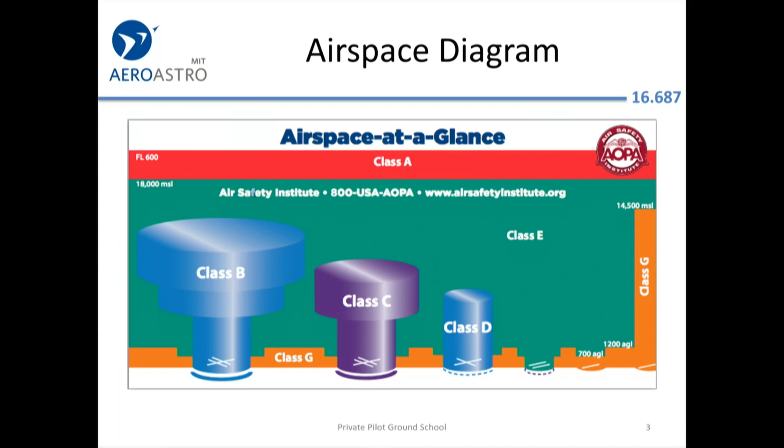Airspace, go and study this a little bit before the exam. Here are the different kinds. Remember, Class A is up high, you need an instrument clearance. Class B is around the biggest airports. Class Charlie is around Manchester, New Hampshire. And D is for Hanscom. And E is kind of everywhere else.

The goal for the basic VFR weather minimums is to make sure that an IFR plane coming out of the cloud has time to see and avoid you. Because the air traffic controller's job is to separate IFR airplanes from each other, not to separate IFR and VFR traffic. They will tell you about them, but you're responsible as a VFR pilot for staying reasonably clear of clouds. So just review these cloud clearances.

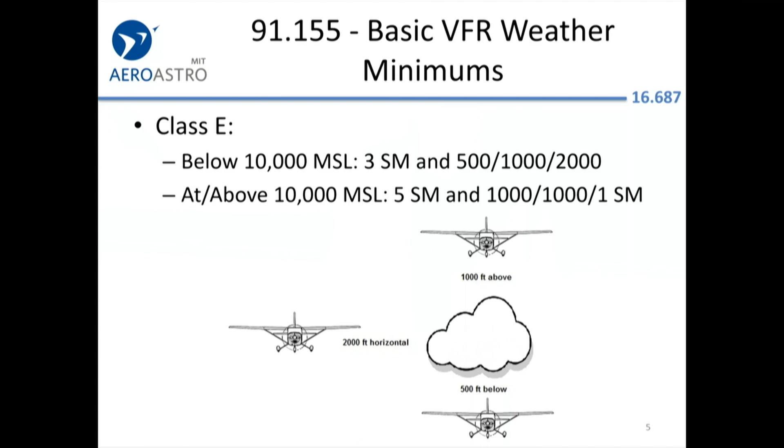Class E, you can see that this is a pretty good one to remember for the test. 500 below, 1,000 above, 2,000 horizontally.

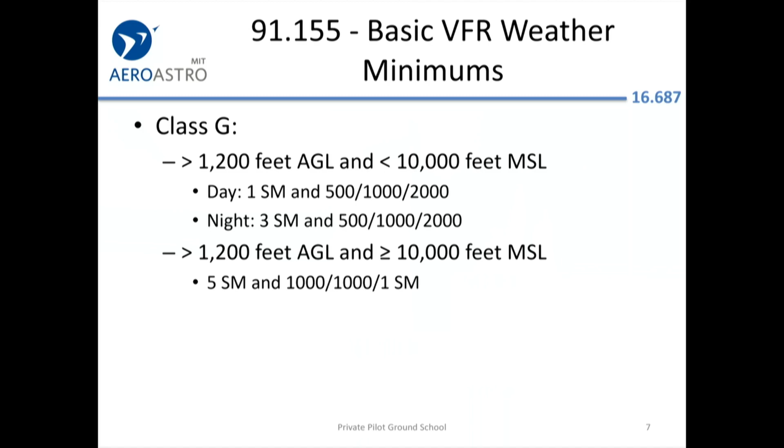If you're really low in Class G airspace, you can do some crazy stuff. Again, I don't think that this is really there to let you go from Boston to Chicago, scud running, with 1 mile of visibility and just clear of the clouds. I think it's more to enable people to take off and do pattern work at their home airport in some kind of little tiny, very slow airplane. Pattern work is just what we were drawing on the chalkboard, flying the traffic pattern at an airport. So again, just review the presentation or the FAA book so you know your weather minimums.

Incredibly, at night for Class G, getting back to that pattern work thing, if you want to go out and practice takeoffs and landings at night, if you stay within half a mile of the runway, you can go right down to 1 mile of visibility and right up to the clouds.

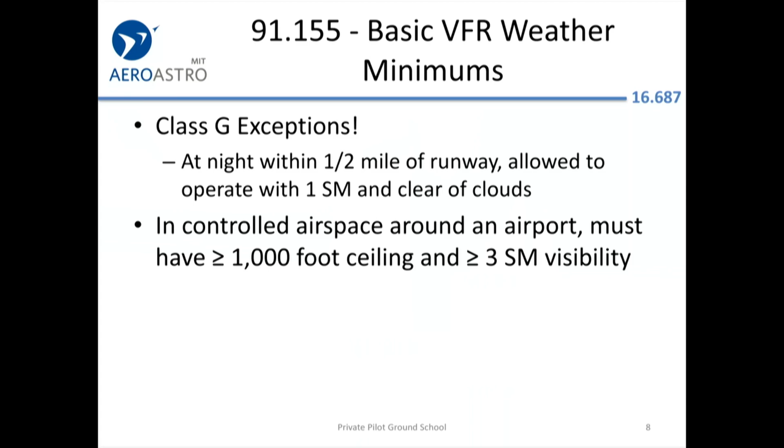Here's that chart again. Learn it, know it. Special VFR. Actually, if you're at Hanscom and the weather is below the basic minimums and you want to do some pattern work anyway, either in a helicopter or in an airplane, you can request — they can't offer it, but you can request — a special VFR clearance and they'll say okay, there's not too much IFR traffic right now. So you take off and land and do your stuff. If it's at night, you'll have to be an IFR pilot, basically.

Cirrus publishes this good personal minimum matrix. I wouldn't say that you have to adopt their specific numbers, but I think their way of thinking isn't bad. So notice they're saying, if you are, let's see, an average pilot — so you've got 10 IFR hours within the last 90 days, you've done 1 non-autopilot approach within the last 90 days — we'll go over here and go down to a 500-foot ceiling and 2 miles of visibility. Don't go down to the published approach minimums, which are designed for a 2-pilot professional crew, unless you're very current and you've done a whole bunch of flying in the last 90 days.

Anyway, so they just try to fit — they try to say, how challenging is this flight? How experienced are you in general? How experienced are you recently? And come up with some numbers. So again, you can pull this out of the slide.

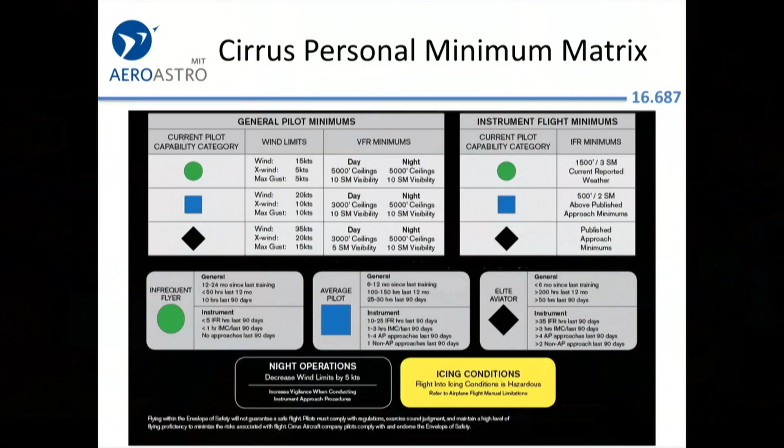And just to clarify what we're talking about when we talk about personal minimums: there are minimums that you have to know for the FAA exam, like we were just talking about in terms of the minimum visibility that must be there in order for you to fly in certain classes of airspace. But then there are also minimums that you set on yourself to be a safe pilot and to be knowledgeable about what your restrictions and what your experience and what your currency is.

So for example, we talked about crosswind. There isn't an FAA reg necessarily — as long as it's within your aircraft's operating conditions, there's no specific reason why a 15 or 20 knot crosswind is a problem. But maybe you're not very comfortable with it, you haven't done a lot of slips recently, you're still getting used to your aircraft. So you might say a smaller crosswind or gusting winds would be appropriate for you to land in. That's setting a personal minimum on yourself, an example of personal minimums based on your experience and your currency.

The FAA will never suggest this, but the appropriate escape from a challenging situation that you think might be on the edge of safety is to rent the 5-seat SR-22 instead of the 4-seat SR-20 and go with an instructor. So it's as easy as that.

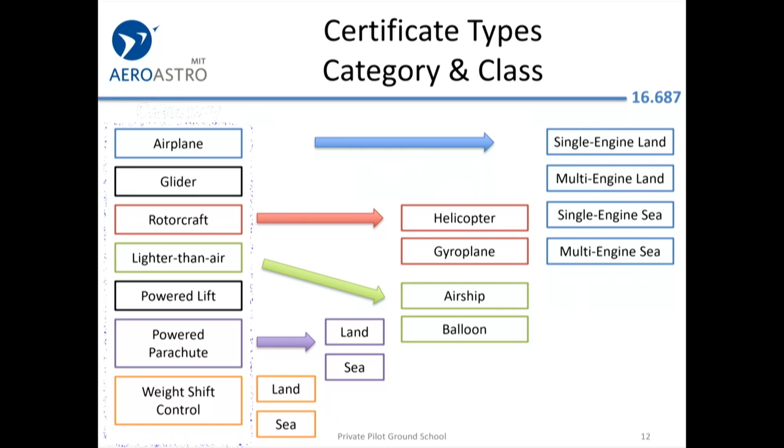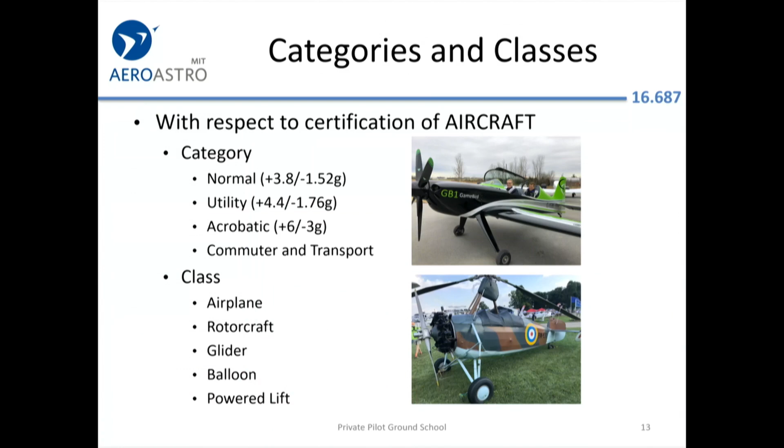Remember this was confusing: they used category and class to mean two totally different things. For getting your pilot certificate, category is something like airplane versus rotorcraft, and class would be multi-engine land versus helicopter. But for aircraft, they do something totally different: category would be normal category or acrobatic, and class would be airplane. They may ask you about this just because they like to torture you.

The 4 forces of flight, remember these. Tina talked about them. If you're just bombing along straight and level, not accelerating, then they're all going to be in balance because F equals ma. Anyway, F equals ma, I know that much.

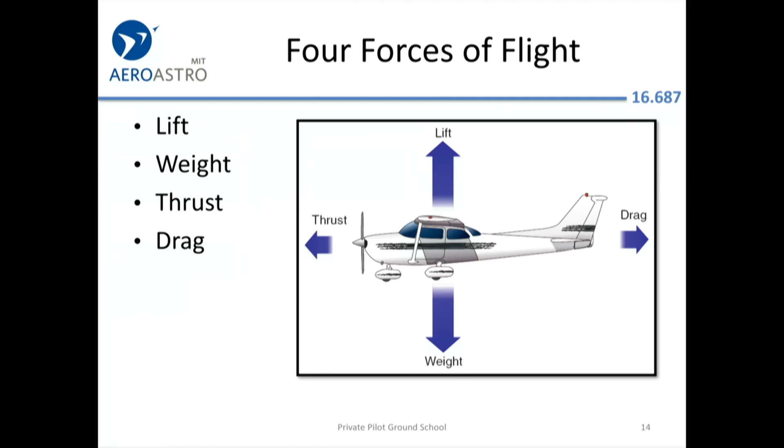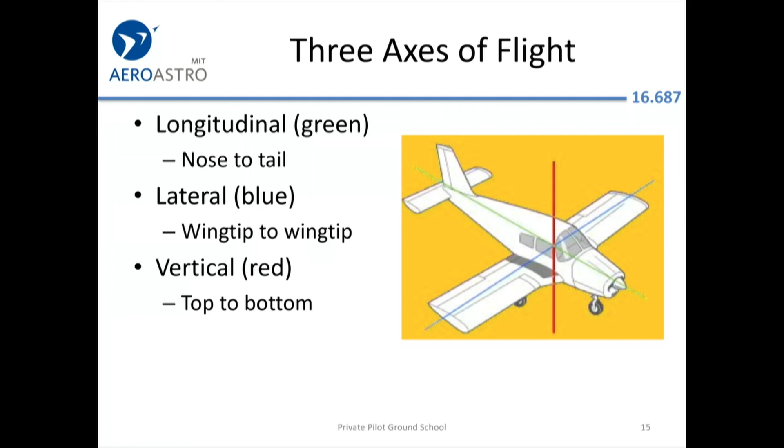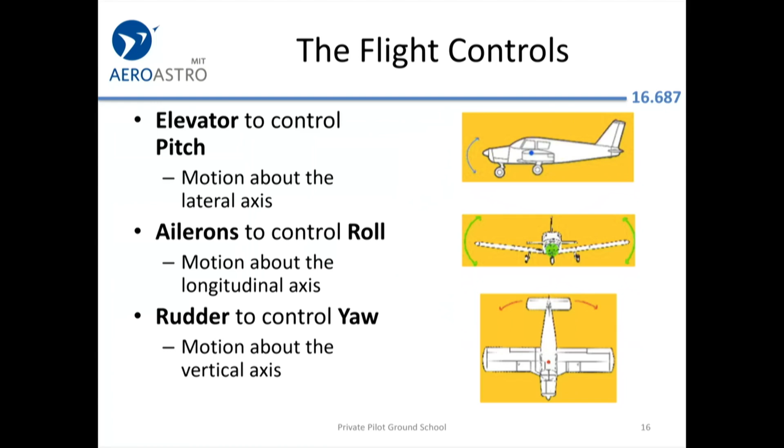Remember these 3 axes, they'll ask you about this on the test, usually in combination with other stuff. Rotation about the vertical axis is yaw. Rotation about the lateral axis is pitch. Rotation around the longitudinal axis is roll. So pitch, roll, yaw - think about it. Roll is really the lateral motion, but it's around the longitudinal axis, so don't get confused there.

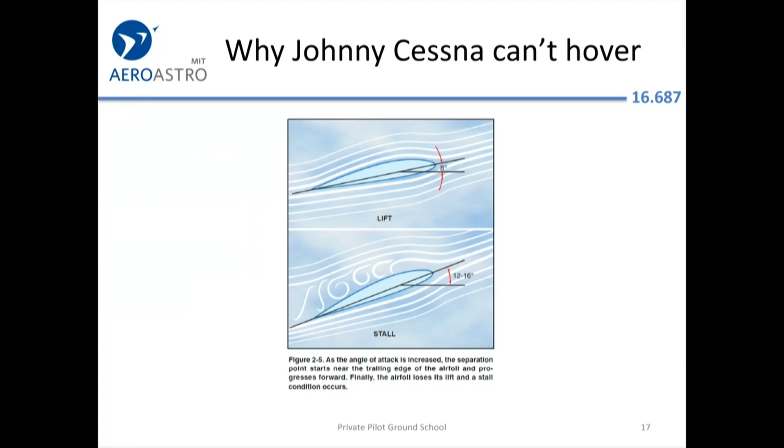Remember why Johnny Cessna can't hover - this limits everything basically. The stalling angle of attack is why you need a helicopter if you want to hover, and it's why you need to maintain a reasonable airspeed when landing, and it limits your runway. If you had an airplane that didn't stall until some crazy angle of attack, you could probably take off and land in 50 feet.

Remember that even a paper airplane can generate lift. So it's not about the shape of the cross-section of the wing that lets you generate lift - it's the angle of attack and your ability to deflect air molecules down. That's what generates lift. The shape of the airfoil is just what Philip was saying - it allows the stall speed to be lower.

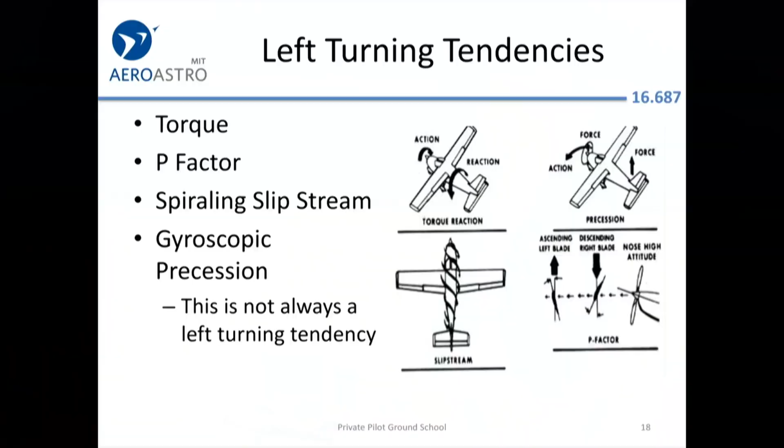All right, remember your left turning tendencies. Mostly you just need to remember that you need right rudder.

A couple questions had come up on gyroscopic precession, so I added 2 videos about gyroscopes to help you understand gyroscopic precession and why that force is applied 90 degrees later. Those are really fun videos you can look at - they're in the slide deck called Q&A and Review.

Okay, let's go back to the altitudes. True altitude is your actual height above sea level. This is important if you want to get over a mountain, because the altitude on the chart for the mountain is also the actual height above sea level.

Indicated altitude is what your altimeter shows. If you're below 18,000 feet, it's not some insane temperature, and you've got a current altimeter setting from air traffic control - as you fly along with VFR advisories, they'll keep updating you with altitudes. If you're not talking to ATC, you may tune into the airports you're flying over to get the altimeter there. If you have your correctly set altimeter, it should be pretty close to your true altitude, and the GPS will give it to you as well.

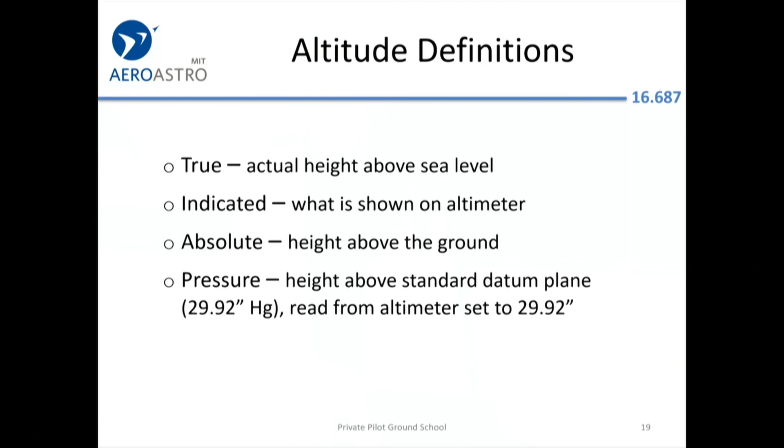Absolute height above the ground, I don't think that's ever really relevant. Pressure altitude is what you see if you tune your altimeter to 29.92.

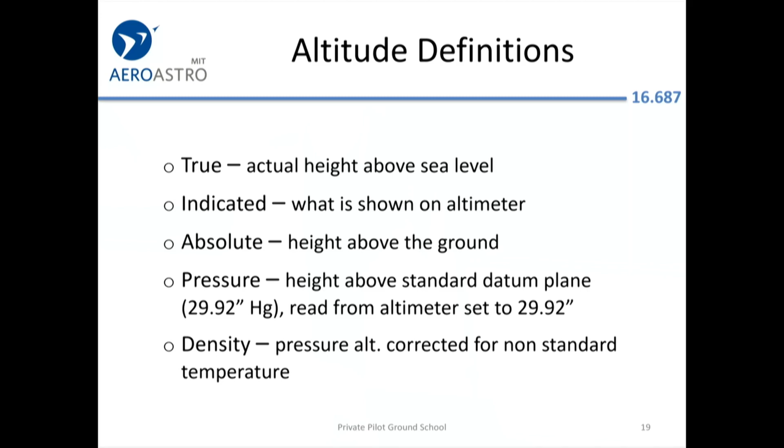Density is critical for determining performance of both the aircraft and the engine. That's a measure of how many actual molecules of air are there going to be in, say, a 1-liter cylinder.

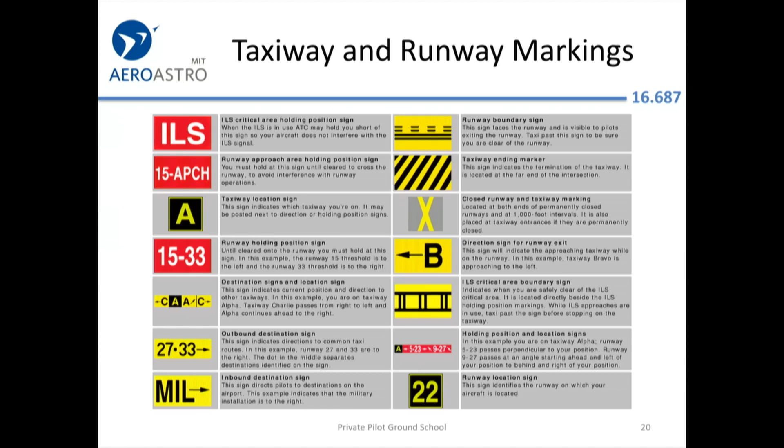Even though you're not an instrument pilot, they probably want you to know about this ILS hold short line. In bad weather conditions when they're using the ILS, they don't want you going beyond there, because your metal airplane might interfere with the radio beams being sent up to landing IFR airplanes.

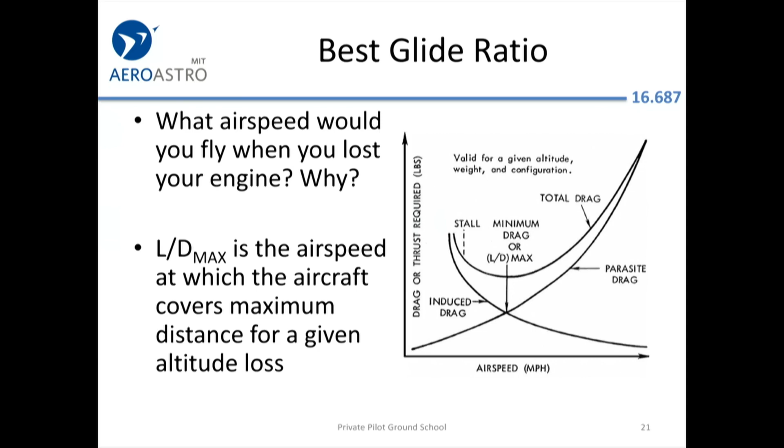Remember L over D max for best glide speed. So all these climb speeds, glide speeds, etc., are driven off the points at which the various drags reach a minimum, or a minimum per mile traveled.

Thunderstorms—the one thing I hope you remember is that everything's bad about convective clouds. Unstable air leads to cumulus clouds, which can become cumulonimbus clouds. Now you have a really bad hazard to aviation with terrible icing, terrible turbulence, maybe hail.

The squall line—I think they sometimes ask about this on the test—is the frontal band of thunderstorms. It's hard to get around them. You may have to go 500 miles out of your way to get around a cold front, or hang out on the ground for a few hours and wait for it to pass.

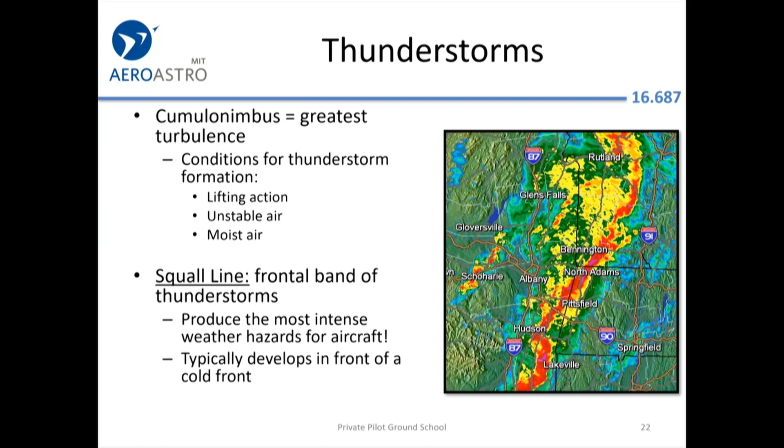Also, big changes in weather usually are not a good thing. Whether it's a big change in barometric pressure, or like we saw from yesterday to today, a 40, 50 degree increase in temperature, it's going to be accompanied by massive gusting winds. Today is not a good day to go flying.

Although actually it might not just be the day. We were ferrying a helicopter from Los Angeles back to Boston, and there was a thunderstorm coming in, so we just landed at an airport. It was probably gusting about 30 knots at the time, which isn't that bad for a Robinson, a 4-seat Robinson. Put the helicopter in a hangar. There was a huge storm, and 2 hours later we took off in beautiful weather and continued our flight.

There is usually an airport every 10 or 15 minutes of flight time, so take advantage of that if things are getting beyond your comfort zone. Don't just blindly continue to your destination.

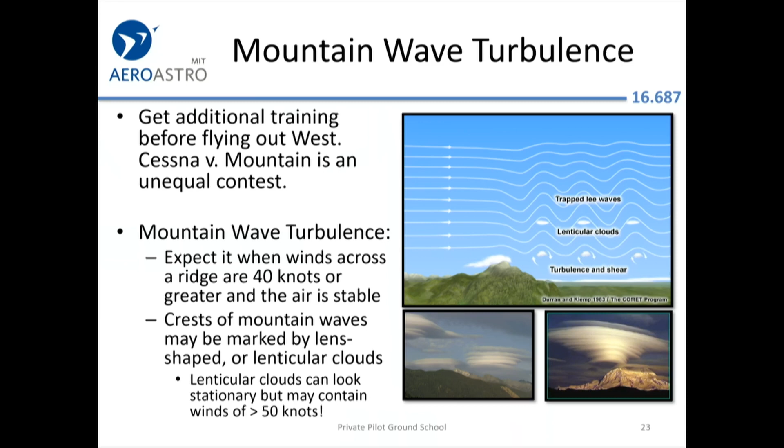Remember, the lee side of mountains is where you can get a lot of turbulence and downdrafts. A little airplane doesn't have a whole lot of climb performance usually, especially at higher altitudes. So be cautious about crossing big mountain ranges unless the winds aloft forecast is for very light winds indeed.

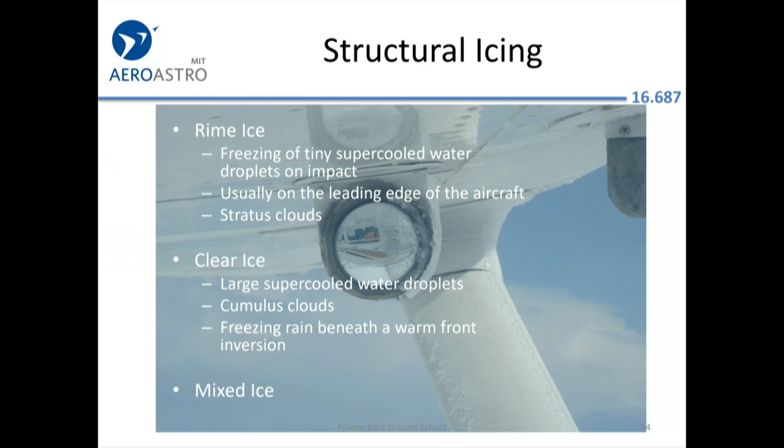Icing—also super bad. As VFR pilots, you shouldn't have to worry about this once you get into instrument flying, as I hope a lot of you will. This is really what limits your ability to travel around in a Piper, Cessna, or Cirrus during the winter and shoulder seasons.

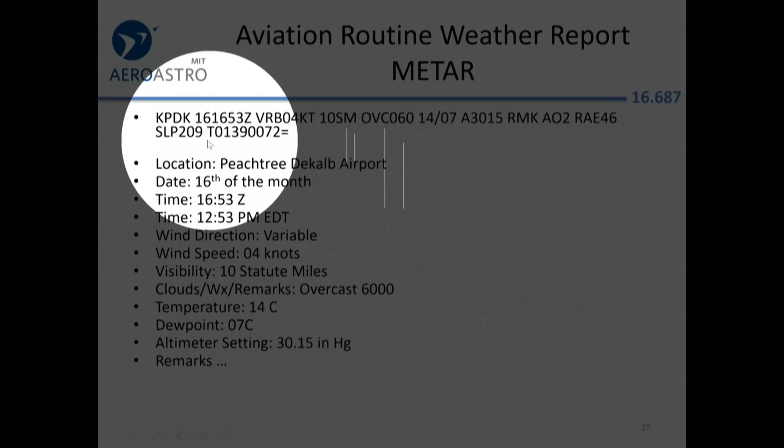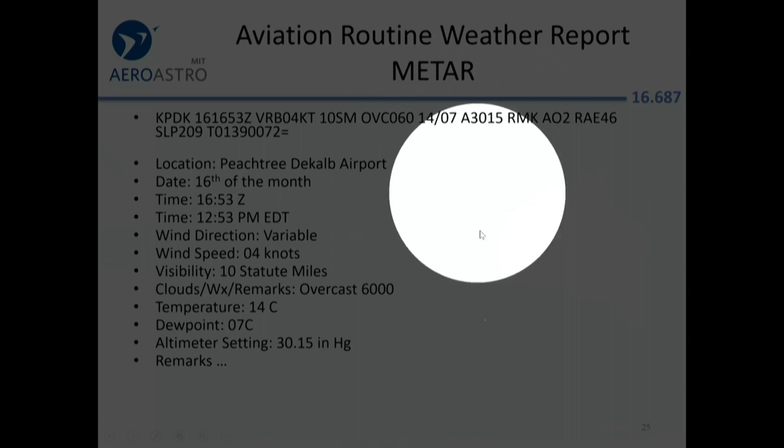Remember how to read a METAR. This is back to Peachtree DeKalb Airport in Atlanta. It's the 16th, 16:53, so about almost 5 p.m. in London, Zulu time. Winds are variable, 10 statute miles of visibility, overcast 6,000 feet—that's 6,000 feet above the airport, not above sea level. Temps 14, dew point 7, altimeter's 3015. And in the remarks it says the rain ended 46 minutes after the hour. There you have it.

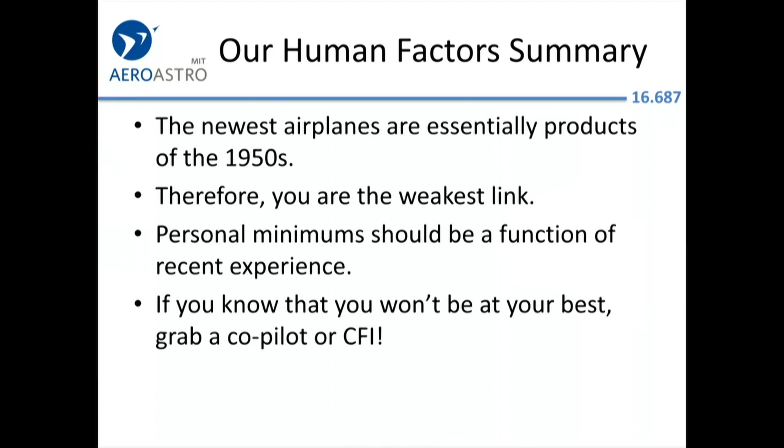Human factor summary: you are the weakest link, and if you develop some personal minimums, you'll be way ahead of the game. They should also factor in your recent experience, not just your overall level of flying. And always remember it's a big aviation community—there's a lot of people who are happy to go flying. You can send mail to members of the MIT Flying Club and just take a co-pilot. That's how the airlines have cut risk almost to zero.

Magnetic variation—this is kind of a topic that tends to snag people on the knowledge test. Just remember, you can rederive it from the VOR if you ever get stuck, and east is least, west is best. Deviation—don't get deviation and variation confused. Deviation, remember, is that tiny little correction printed right underneath the compass.

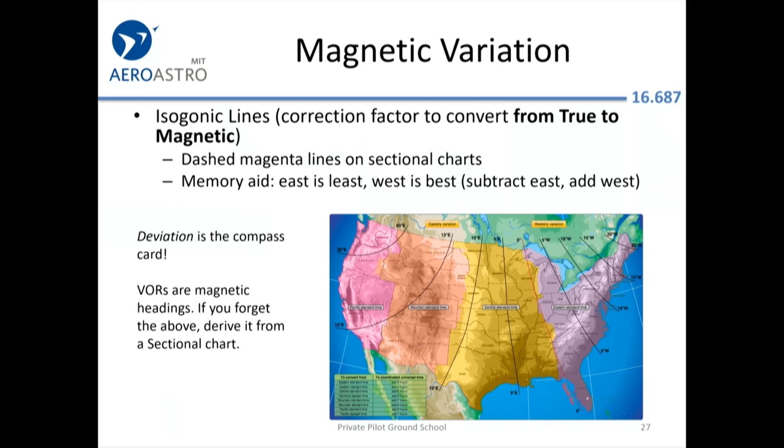Night flying advice you just heard.

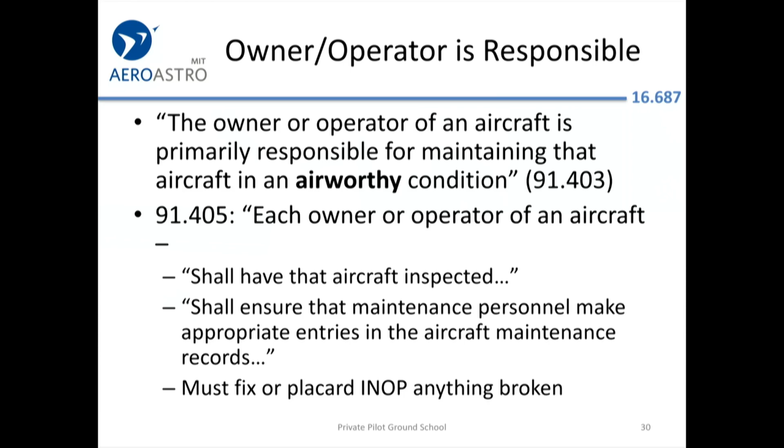Remember, as the owner-operator, you're responsible for keeping the airplane airworthy if you do choose to go out and buy an aircraft. For most of you, these responsibilities are going to be on the flight school. However, you're still the final authority as the pilot, and you can deviate from the rules in an emergency, and you only have to report the deviation if requested. I think the feds like to ask this on the knowledge test because the natural answer is, of course, you have to report the deviation. But if you declared an emergency and broke the rules, you don't actually have to report that unless they ask you to.

But even aside from an emergency, you're the pilot in command. Even if someone very assertively tells you to land and hold short, or to fly straight to the numbers—meaning don't fly the proper traffic pattern but land very quickly—or tells you no delay on the go because they want you out quickly since they have other jets, you can just say unable.

They have to deal with it and make sure you're flying safely. And especially as a student pilot, if you need extra time or consideration, just add 'student pilot' to the end of all your radio calls. They'll give you plenty of room to make mistakes, but they might also make you fly a bunch of 360s while they land everybody else, then give you time to land.

Yeah, so safety is not high tech. It should be, probably. All the stuff that Michael showed you that's embedded in that DJI drone should probably be in these multi-million-dollar aircraft, but it's not.

So in the meantime, since an airliner isn't actually that much smarter than a little Cessna, why is it safer? If you take that perspective and adapt all the things the airlines have done, you can make flying that little Cessna dramatically safer.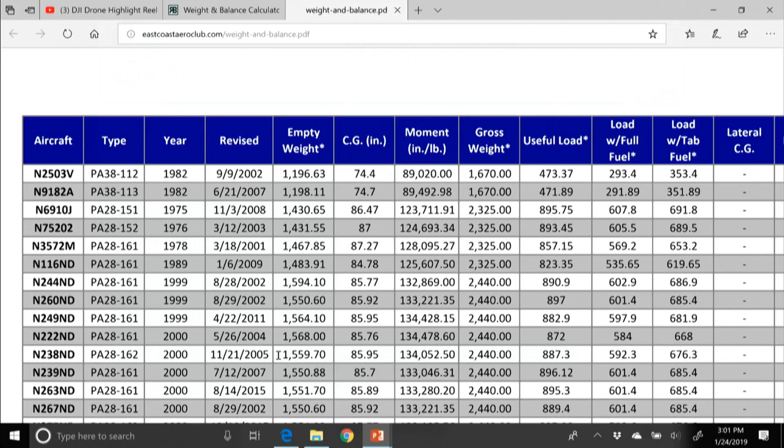You go to this King Schools thing, and you say you want to do 60 questions—60 is the number of questions on the actual exam, so we're making our final exam the same. Then you start the test, and you send us the results.

And we'll be happy. All right, next steps—if you want to continue your journey beyond this class, maybe that's for the one or two people.

And can I borrow, for whom that applies, that actually want to continue their journey—can I borrow the pointer for just a second?

Okay, so yeah, join the flying club, go visit a flight school. Most of the busier US airports have some kind of flight school that you can attend.